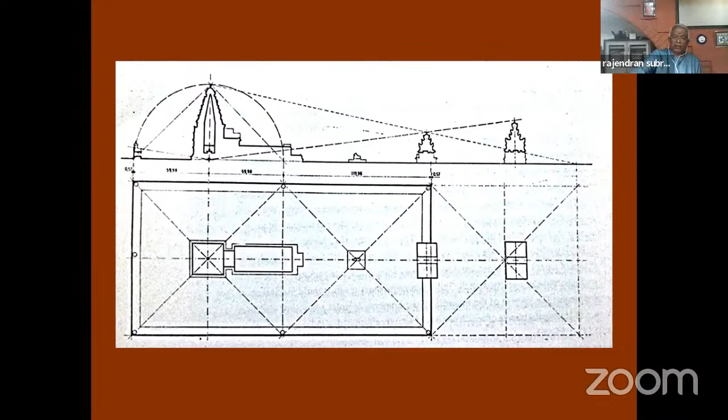We call it modular coordination. That way they have done it. How they did it, we don't know. How they calculated, everything we don't know. We are not able to bring it to that.

Decipher that - see, this is a mandapam in the front. This is done by Marathas. And this fortification, the outer fortification wall, is all done by Marathas. And this is the place, and this is the first tower.

We go for Keralantakan Vasal. See, this is the second entrance seen from the first entrance. We'll go one by one.

See, you are entering. They say many things about the big temple, that the shadow doesn't fall, all those shadow falls - lot of misinterpretations are there. The actual wonder is not revealed outside.

The first beauty, the wonder is the door jamb stones, we call it Nelaikal. This is approximately, including the piece which is hidden, around 40 feet, 39 to 40 feet. When they brought it, that should have been about 5 feet by 5 feet. Now the existing one is 4 by 4 square and vertically positioned. This acts like a door jamb, Nelaikal, and this is the toughest spot.

How they brought it - this type of stone is available in 2 places, one is Nathamalai and another is Kolli Hills. This variety of granite, so either from Kolli Hills or from Nathamalai, we are not able to decipher. Still we are contemplating. So this is the stone which is placed vertically. How they brought it and placed it vertical, it's a wonder.

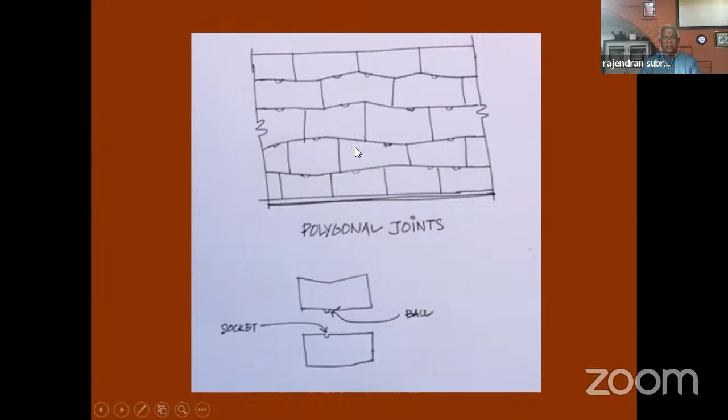See, look at the British when they took over. When Serfoji was here, during Serfoji's period, the British took over and reduced the opening here. Can you see that the original was like this? The big stone is somewhere here. They reduced the opening by providing a block, something like pieces of an arch, to have a safety door at the top so nobody could climb here and come through. For safety, they used this arch buttress.

And now we are going to the second entrance. Second entrance, watch this. This is a Dwarapalaka, we call it. This is about 13 feet in height, and from here it is about 18 feet to the top. This has got 4 hands and 2 legs. One leg is resting on a gada, a weapon. So we will go nearer to him and see what is there.

See, look at this. This art, we call it surrealism - that is, what is not in nature, they give as surrealism. Realistically, they will give a complete composition like that so that people can understand what it should be, the scale.

Look at this, the left foot is like this, right foot is over the gada, and one arm is resting on the gada, one is warning - Tarjani Mudra, we call it, Bharatanatyam Mudras only. This one, Viswarupam, and somewhere here he shows this direction, so the person inside is a great person, go carefully. That's what is warning. And you know, the gada has a snake winding over it, and he's trying to swallow an elephant. The snake is here, trying to swallow an elephant.

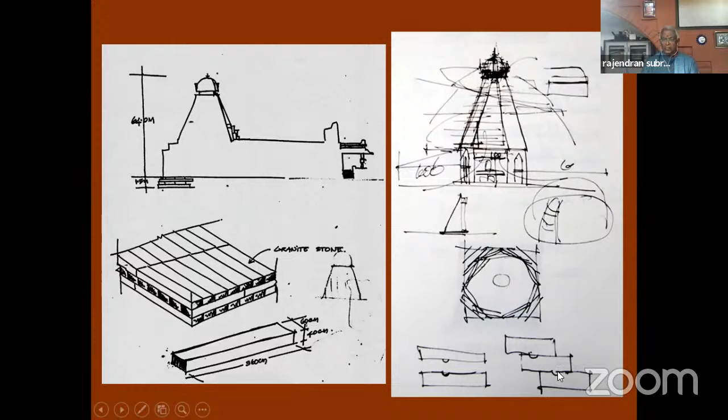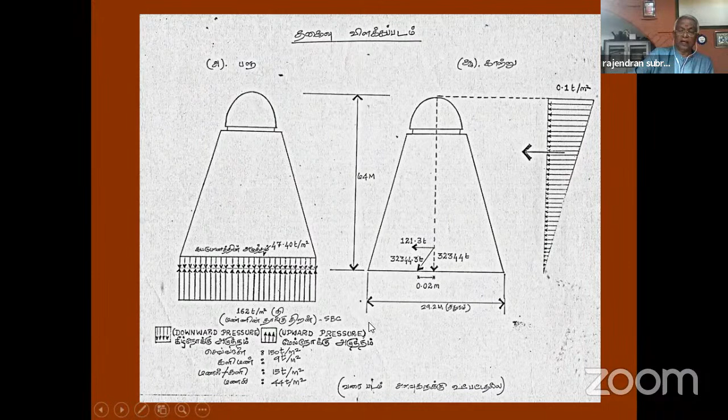We had worked for a PhD for somebody, we worked on the shear force diagram, and we found out the load which comes is only 47.4 tons per meter square, whereas the soil bearing capacity is about 162 tons per meter square. Unbelievable science - they knew it, they had done it. That's a beautiful thing. I don't know how they did it, what calculations they did, we don't know.

Look at this, this is the temple plan, sanctum sanctorum plan. The inner portion is about 11 feet. And then there is about 3.3 something, and this is a 6 feet corridor all around. This is a 13 feet width - sorry, inner is 13 feet 6, and outer is 11. It's concentric squares placed on that. The sanctum sanctorum inside is 26 feet, 26 feet, 26 feet square. Only the northeast is about 1 inch more than the other sides.

Beautiful - I was lucky enough to get a chance to be there during that Kumbhabhishekam period. I was in charge of the sanctum sanctorum and Yagasala, so I was able to see them frequently, go inside and take measurements of all. So this is how the plan is - this is 100 feet outside, 100 by 100.

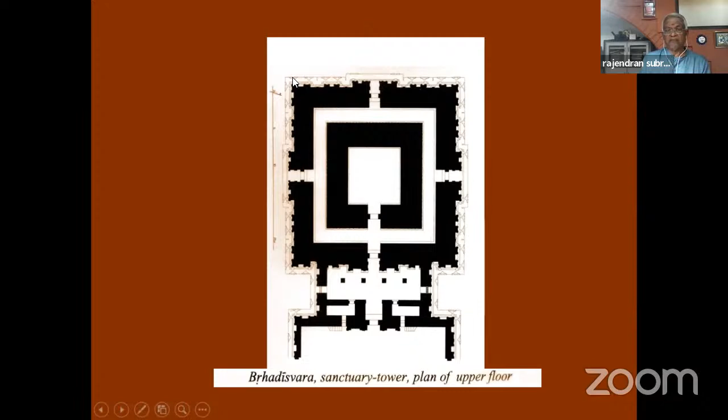Look at this, how the things are - this is the backside. Behind that, the compound wall has got a corridor. There was a corridor above that also, where the royal family used to see. That has been devastated during the invasion, so they've removed the top portion. So only the ground portion is there.

Look at this, the wall - it comes at a point where this is about nearly 15 to 18 feet width at the top, and the whole load comes to this point. From there it gets distributed from two sides - that's the beauty. And they constructed the lingam - they placed the lingam first and then they did the construction around it.

Look at this. This wall is 11 feet thick and this one is 13 feet thick. So this is a 6 feet corridor inside. Look at this, it goes and joins in a corbelling portion. This is a corbel.

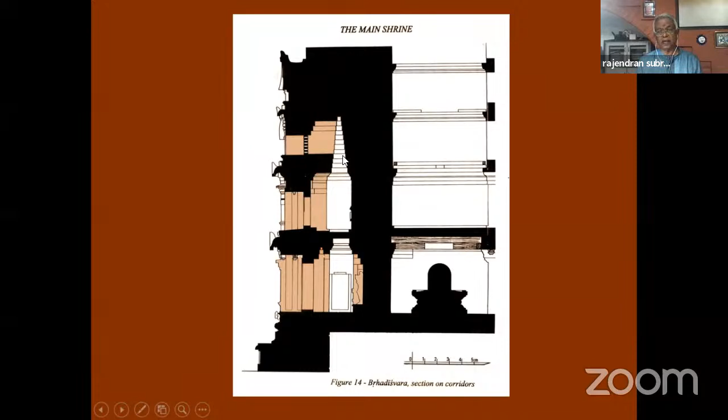This is another drawing done by French architects. See, there is a big false thing here. This looks like a single stone, but it's not a single stone. It's pieces only, about 8 pieces, assembled together. Bringing a single stone to this level is highly impossible.

Even if they say it came from about 10 kilometers away from Sarapalam, where we have to cross 4 rivers, bringing this over the river would be a big problem. So they would have done it only in pieces. When it reaches there, the center comes to zero level at the top, through corbelling, so in the end it forms something like a semi-spherical shape inside.

So they had 2 floors, ground floor and first floor, plus a second floor. It was later devastated by the invasion. They removed it, pushed it out, and demolished this.

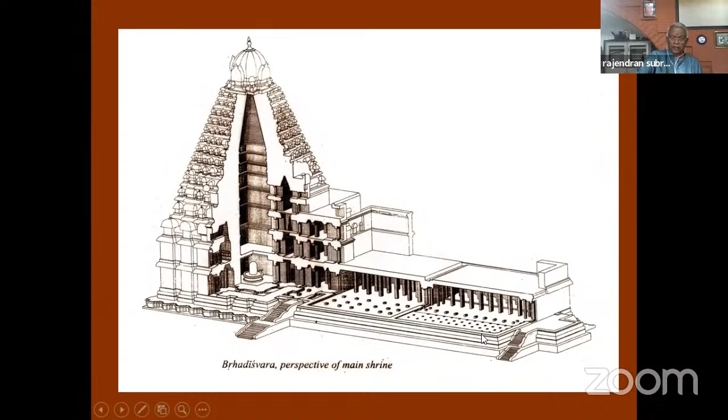Once this started falling, it broke the sides. You can see that in the next part. See the corbelling inside, see the sanctum sanctorum wall, the western side wall, how it is not straight. And you see at the top, the wooden thing, that is where they closed it with wooden planks over it. Look at this, the things fallen from the top have broken this.

ASI wanted to repair that, but later the historians and archaeological conservators said it is against the principle, so they left it as it is. If a monument should be left as it is, it should still be maintained well. That's all, otherwise we will forget about the invasion -- not to forget it or anything, but why should they repair it and introduce a new material, since the life of that new material will be much less than this.

So there won't be any proper joints. It won't join properly, it will create a separate crack of separation. So they stopped doing these repairs. ASI stopped it. And look at this.

After placing all the stones, they marked and then drew the inscriptions. The whole temple is full of inscriptions. Rajarajan maintained a beautiful, fantastic bank system and documentation. Whoever contributed for this temple, their names have been written and carved here. So he has not left anybody out.

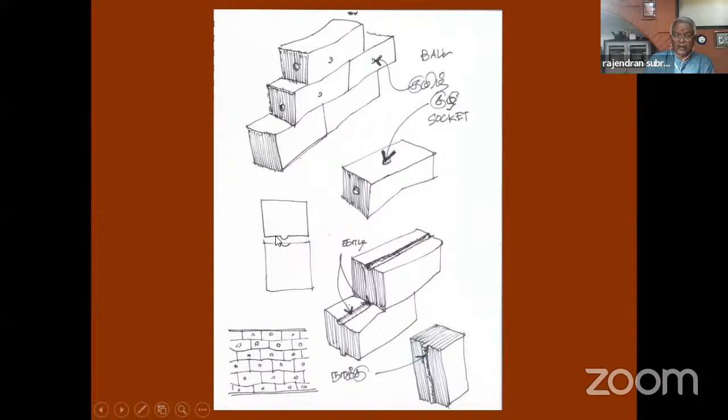See some more of this in detail -- a detailed drawing showing tongue and groove. See, this is nothing but like our Lego, kids play with Lego toys. This is something like that, freely pressed one over the other and then placed.

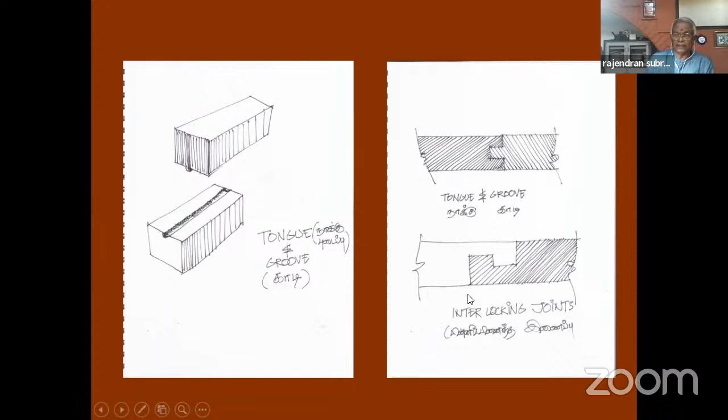And joints are like this, tongue and groove. This is again an interlocking joint of stones. This is a plan, mind you, this is a plan. And look at this, you could see a simple example of this. See, there is no kind of mortar in between, it's placed in position perfectly.

If you want to remove it, start from the top, remove it, number it, then replace it. That's how the big old temples are repaired. If this is west, we number from the top 1, 2, 3, starting in one direction from south to north like this. It will go clockwise, numbering from top to bottom. Then it will be placed back at the same distance. When they repair, after completion they will stack it again.

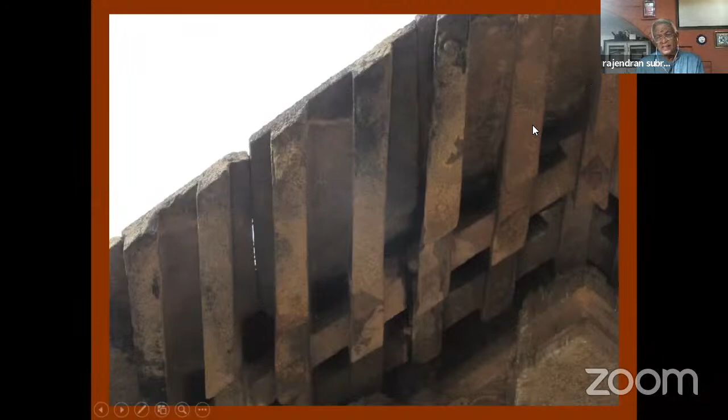Remarkable. This should have been one of the world wonders. I mean, our poor documentation couldn't capture that. See, look at this, how they have removed it. This is a joint from here to here - a straight joint only. Look at this, openings are still there.

This is 7 feet from a 2.1 meter minimum distance cantilever. Unbelievable - see the 45-degree line, how this column supports. Look at the next one - see the column, this is a column to reduce the cantilever length. This comes up, the support comes up to this, so only the minimum cantilever here, and there is a beam. Over the beam, it is using that as a fulcrum.

This cantilever stands with the counterweight at the back - the whole thing is at the back. It's a simple single unit, three put together as one unit. So they had placed it like something like an assembly in mechanical engineering - they made it separately and assembled it. So perfect. See, this is a drawing for that.

I had done it, sitting there and using it. Look at this, look at the distance and see the plan, how it is angled. So the inside will be straight. So this stands on angular friction - nothing can fall.

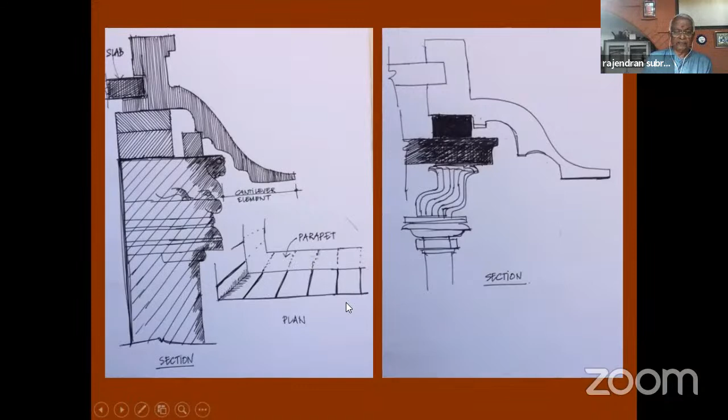Look at this. You all are engineers, that's why I'm showing this. This is a very important thing, how the construction was done.

Look at the massing they have done. This one level, from here to here, one level - it comes here, the water drips, and the next level goes below so that the water comes through that and falls. Look at how they have done it. Modern architects do that - one side, if the thing is down, they bring it, the next one they'll end it at the top. But this similar technique was followed 1,000 years back.

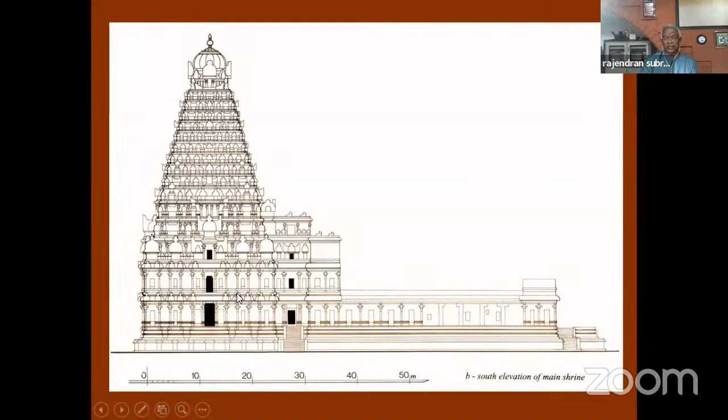Look at this. These are again the drawings from the French architects. This myself, Kudavayil Balasubramanian, he is a great scholar of Chola dynasty, an authority in Chola dynasty. I used to learn a lot of things from him. I used to accompany him wherever he goes. Through him only, I did this drawing for him. As he said, I had done it. And this is the floor - the completed floor must have been like this.

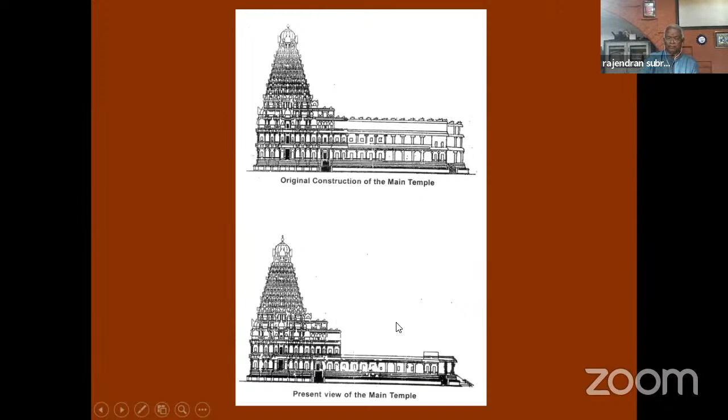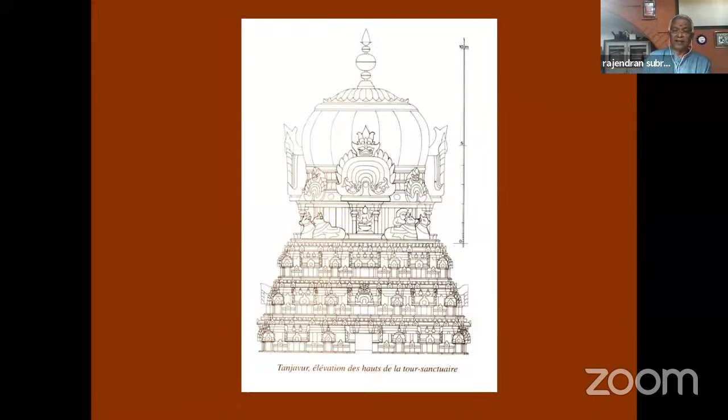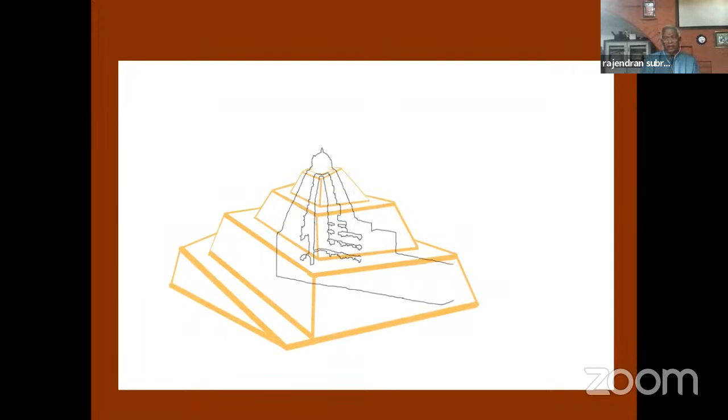The ramp - our typical overbridge ramp standard is 1 in 12. They would have done it that way. We calculated that the ramp came out to about 600 feet from here. So it is possible to maintain that ramp with the angle of repose of the soil. They have done this - this must have been the procedure used to lift the materials and construct the temple.

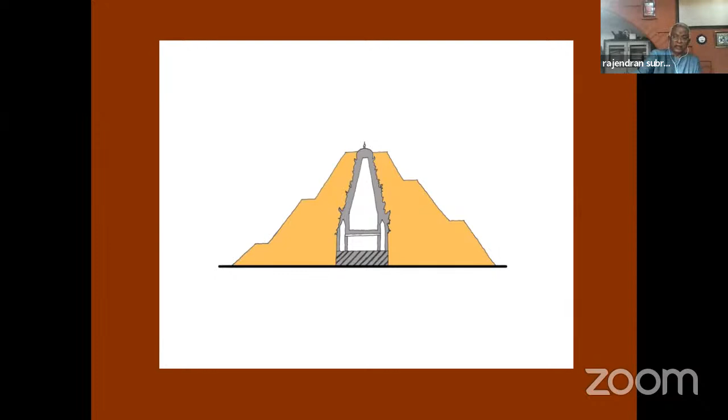Modern temples are built like this too, with some other sculptures. This is the same system our forefathers followed. See, this is a beam, this is a bridge, a bed block over that stone, which stands on another stone - freestanding. It's done like this. Modern temples are built with these traditional methods.

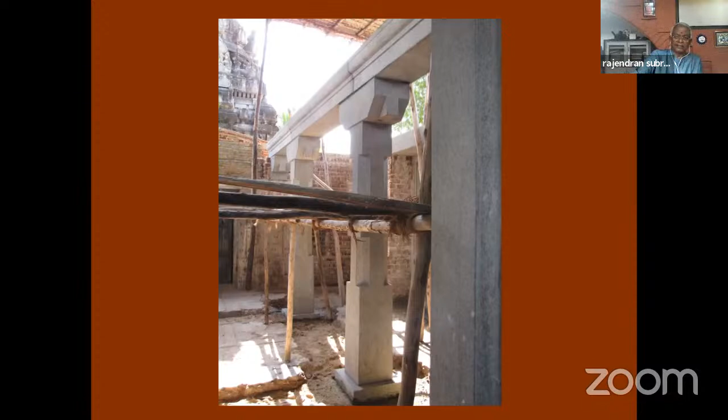Coming back to the present, the teamage is a German technology. All the Chennai Silks buildings are constructed using this technique. You see, up to the foundation they don't have any particular system - regular precast with dowel rods, 32mm or 36mm, to a height of about 75 centimeters.

They have precast beam columns - you see the column lying down with RCC rods over it, and holes on either side, 3 holes each, where the rod comes through - 6 rods. They pump epoxy-based adhesive, like araldite or 3M paste, in high pressure, and it stands. Over that, they put the beam, then the slabs.

Everything is precast - this is nothing different from what Rajarajan did. Same columns, same bed block, same beam and slabs. Only the span was smaller because the stone was smaller - the maximum span, the length of the stone, must have been around 12 feet.

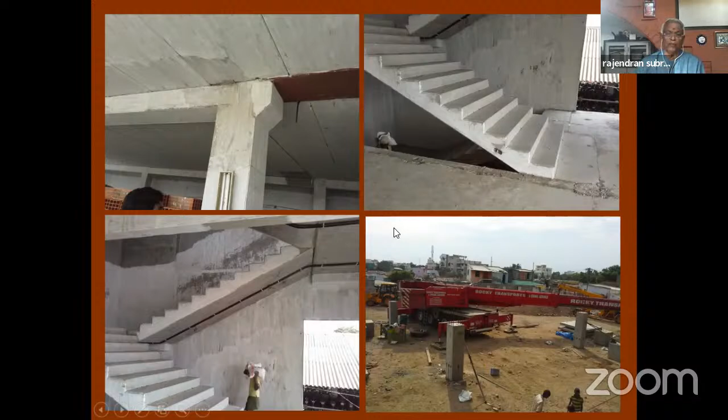See the precast staircases - this is how they had projections in the columns itself, so they used to place it. Wherever they had some other height problem, they used steel I-sections. This is image work in Chennai Silks, one of the Chennai Silks buildings at Tirupur - I have taken the photographs. Look at the staircase, the dowel rods, the holes in place for the dowel rods to fit, and here also 3 holes. It's placed there with the help of a crane.

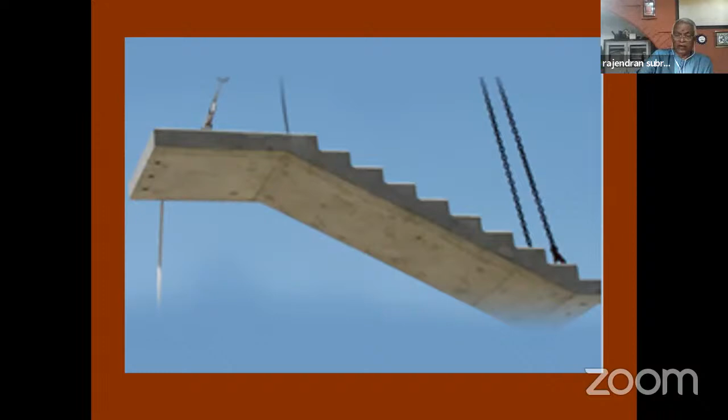The only thing is, for a building constructed in this technique, you need an equal area of land outside - either on the left, right, front or back - so the crane can be placed there to shift materials. This comes from Vellakoil - near Vellakoil there's a factory. T-mage is German technology; they do it. Look at the slab, how the slabs are placed.

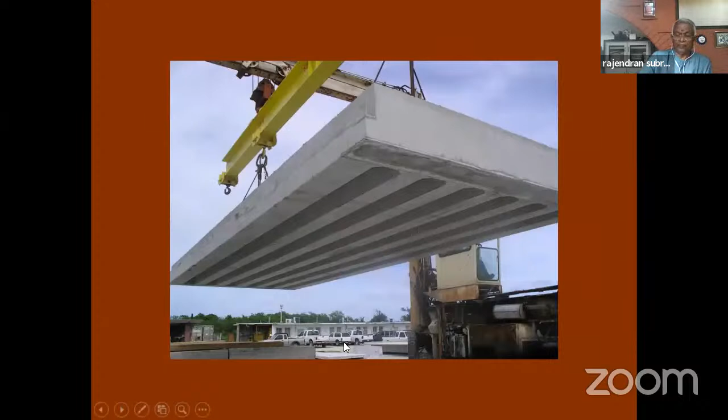See, staircases are placed and slabs are placed, and they fill it with screed concrete over it. See this column, see the beam. Let's separate it.

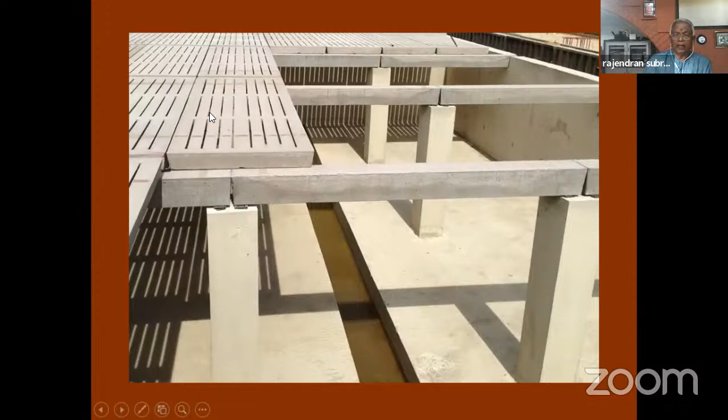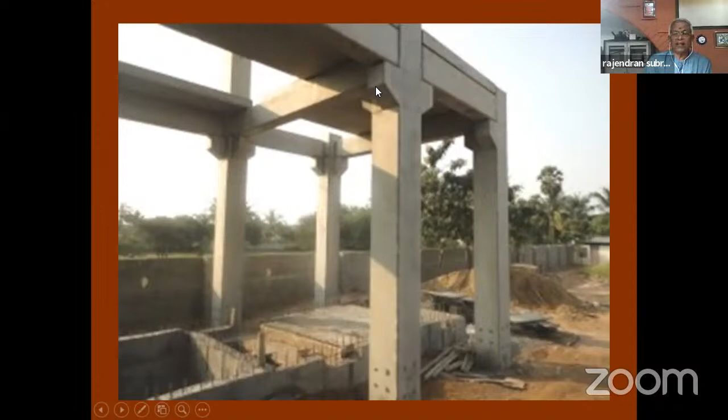Look at this, similar to what we saw in Rajarajan's thing, the bed blocks, Podigal. Nearer to that. See, look at this.

See, to keep the verticality, they use jacks here, with screws on the side. This is the steel props we have, modern. Without all these things, Rajarajan has done it.

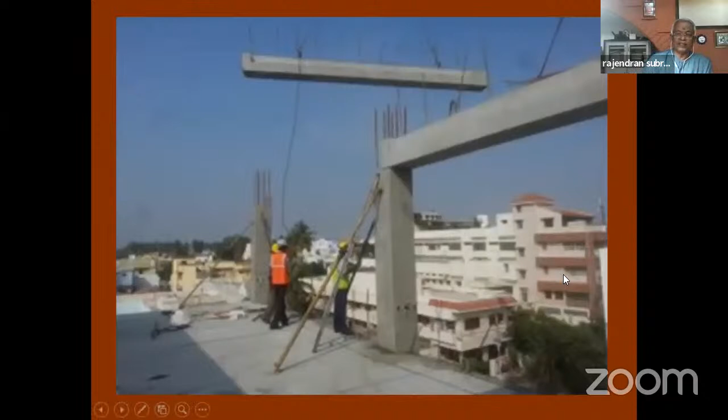Just they fix the date and start the business on the date, and they do all the interiors, everything. Once the first floor is complete, ground floor interiors will be done. Once the first floor is completed, they go to the second floor, and first floor work is completed, that they do it.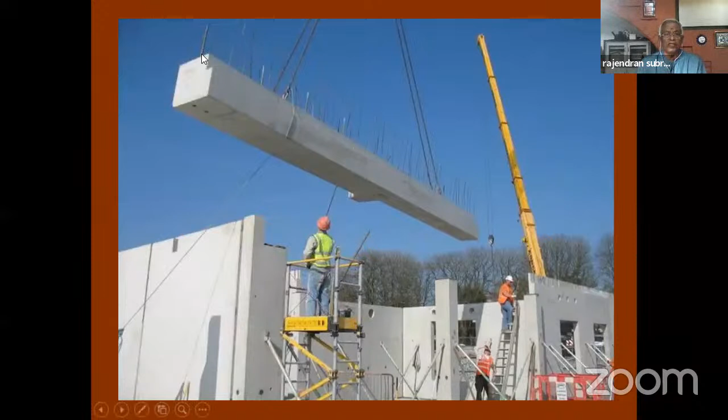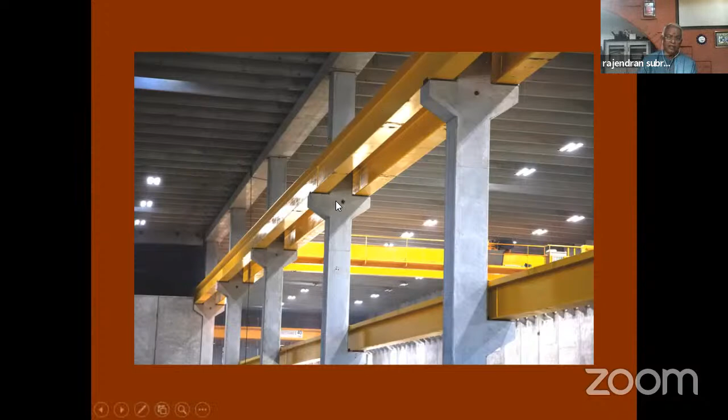See that, it has got double rods on top for the slabs to rest. See the offset resist area. This is Chennai Silks building only. Most foreign countries, when you go to a mall, you see these types of things only - all precast, done with something like a gantry girder in your workshop. The crane moves in this and lifts everything. See the T-beam, I mean the columns placed like this.

Now coming to that, I've compared that with the modern construction technology, and our Periya Kovil big temple construction is nowhere inferior to that, and the methods, the principles are the same. Only the methods and period is so long.

Clear picture. You know why they call it that in Tamil? Only the Tamil teachers have made it wrongly - they've understood wrongly and they've spread it. Nizhal Saya Gopuram - they say in most Tamil textbooks it is there.

I have informed the Tamil Textbook Society, the Textbook Society of Tamil Nadu. There was a minister in charge of that, luckily known to me, so I told him don't do that, it is different. See, Uchi Veyilil Nizhal Saya Gopuram.